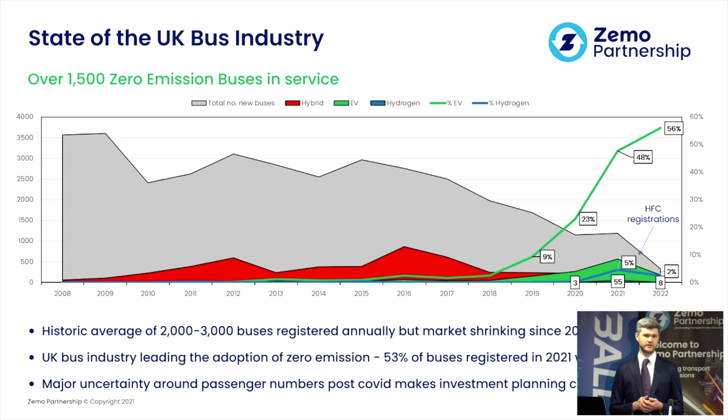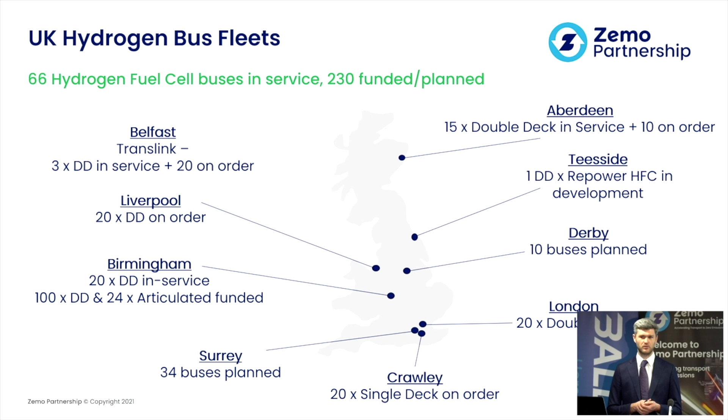In terms of hydrogen bus fleets, we're starting to get a good number of fleets across the UK. We've obviously got those up in Aberdeen, we've got the ones here in London and those in Birmingham, and we've got a good plethora of fleets coming on board. 66 in total are in operation today. We've got another 230 funded or planned. So we will have a decent number in the next few years of hydrogen buses on the road.

There are also major hydrogen infrastructure plans. Obviously, we've had the hydrogen strategy from government, as well as the Scottish Hydrogen Action Plan, both of which are looking to deploy 5 gigawatts of hydrogen production capacity by 2030. So there's a big ramp up in the next few years in terms of hydrogen capacity. Big hubs are going to be Teesside, Humberside, Merseyside, obviously where there's big chemicals plants, and there's already a big push to reduce the carbon intensity there.

And there are also some interesting projects such as the Dolphyn project up in Scotland, where they're deploying electrolyzers on wind turbines to produce hydrogen at sea. So I'm quite interested to see how that goes.

In terms of bus operations, it seems like there is an emerging trend that there's going to be a centralized production of hydrogen, and then that hydrogen is then tankered to the fleet operators wherever they are. So rather than having decentralized small amounts of hydrogen production, it's going to be produced in large amounts and then shipped to where the depots are and the refueling stations are.

Government funding is very much driving the transition towards zero emission. We've got almost 3,000 zero emission buses outside of London which are either in service or have been funded. There is more funding to come next year - there's 205 million that DfT have yet to allocate for England. We've got another almost 60 million in Scotland to come as well for the next 3 years.

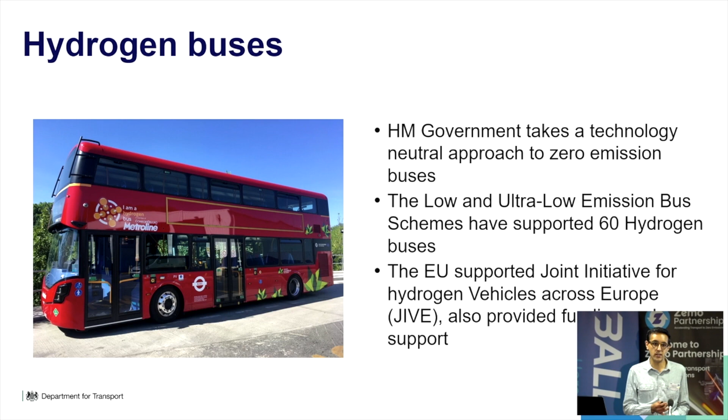I think Dan mentioned the West Midlands hydrogen in his previous talk, and I think it's very exciting because it'll be the largest hydrogen bus fleet in the UK. That was part of an announcement on the 26th of March where we announced almost 1,000 zero-emission buses with nearly £200 million of funding. You can see some more detail on the screen there, but again, that reiterates government's commitment to decarbonising the bus fleet, as we said in the National Bus Strategy and the Transport Decarbonisation Plan.

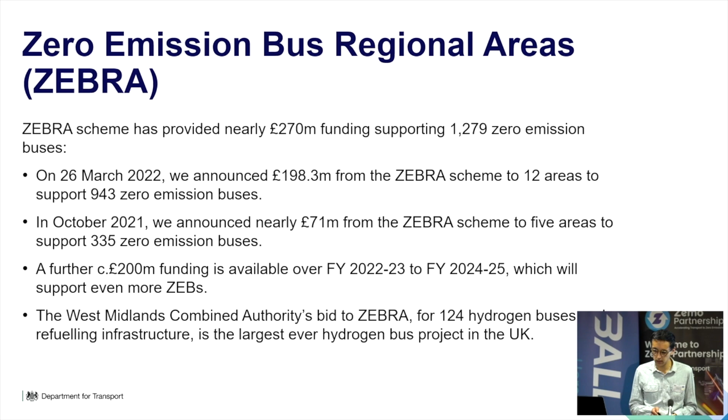Just mentioning another thing that Dan spoke about, which is the BSOG Zero Emission Bus Incentive. As Dan said, this was announced on Friday, the 1st of April. Many of you will be aware that under the old Low Carbon Emission Bus incentive, zero emission buses were only eligible to claim 6p per kilometre under BSOG. Through this, they'll now be able to claim 22p per kilometre.

This is ahead of a broader reform of BSOG, which again we committed to in the National Bus Strategy and which is reaffirmed in the Transport Decarbonisation Plan. A good thing to pull out of the National Bus Strategy is that we call the existing BSOG regime a fossil fuel subsidy. So it gives you a direction of travel in terms of what we want BSOG to achieve going forward - achieving both environmental aims along with increasing patronage and reducing fares. One thing to pull out from this new BSOG announcement is that unlike the LCEB, this will include vehicles which are under 22 passengers/seats, so minibuses which are zero emission will be able to claim the BSOG ZEB incentive.

A bit more on this, specifically on hydrogen. Being pragmatic and recognising the current status of the hydrogen economy, we are not going to be asking, for example through the RTFO, for certification on green or blue or any colour of hydrogen. We're being pragmatic - this is purely for a temporary uplift. The broader reform of BSOG will obviously take a view on the provenance of any hydrogen used, but at the moment we're being pragmatic and allowing any source of hydrogen.

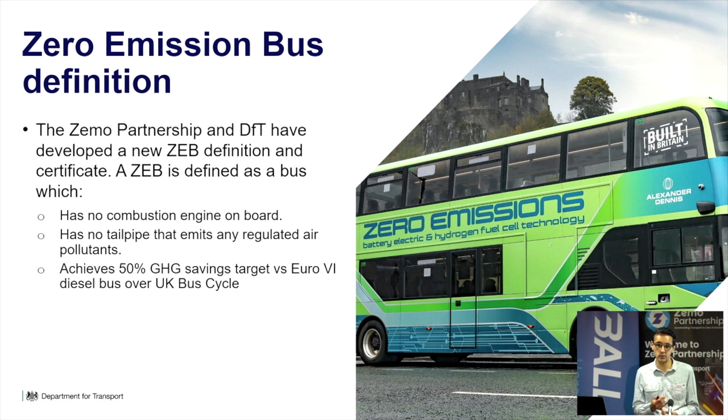Again, Dan mentioned this, but along with Zemo, we've developed a zero-emission bus definition. I'm sure you're all familiar with it. Basically ramping up from ULEB, so instead of 30%, 50%, but the important thing is having no internal combustion engine - so no hydrogen combustion, no diesel heaters - are key things to remember.

Something we're doing with Zemo - this is the Zero Emission Vehicle Repower Accreditation Scheme. As part of that BSOG uplift, we committed that repowered vehicles would be able to access it if they can get a ZEB certificate. The route for them to get a ZEB certificate would be through going through this ZEVRAS scheme. So Zemo are currently convening a working group and looking to put forward proposals, hopefully having something in place in due course.

Just a final update from us. Alongside that funding we announced on the 26th of March, we also announced some policy proposals on ending the sale of new non-zero emission buses. Again, this was something committed to in the National Bus Strategy. We ran a light touch consultation last year, and everyone's input into that helped shape our proposals.

So we're now seeking information on a specific date between 2025 and 2032. A key thing to take away from this is that this would apply to Class 1 and 2, M2 and M3 vehicles, for those of you who like your type approval. We're also taking a question on whether that is an appropriate method to regulate, but it does slot in with the existing car, van and HGV phase-outs. This consultation closes on the 21st of May.

If anyone has any questions about it, I would encourage them to get in contact with the department. There's an inbox, buses@dft.gov.uk, so please just give us an email. We'd be happy to chat through any of the things we've discussed today. But I think that's it from me.

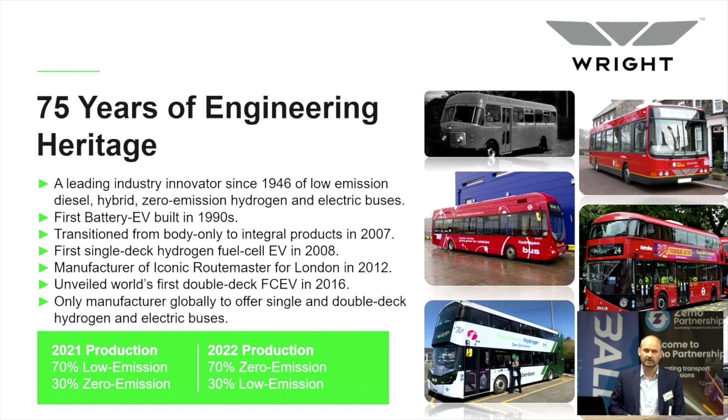An interesting point about production: last year, 2021, we were 70% low emission Euro 6 diesel vehicles. This year, we are 70% zero emission, the majority being EV, although we are pushing as hard as we can to have a mixed fleet across that.

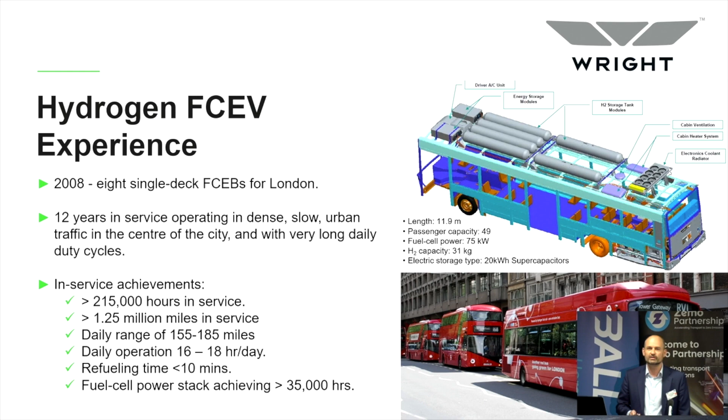Just to touch back on the first hydrogen fuel cell vehicle, 2008, 8 single decks, 12 years of service. I can run through the stats, but at the end of the day they were very successful, which gave us the launch pad to move on to the next product, which becomes the Hydroliner. The figures tie up with yours, Dan, in the sense that this is what will be operating this year for the Wrightbus Hydroliner within the UK.

Just to touch a little bit on the vehicle itself - as a manufacturer I'm always going to throw in another product next to it because we can get away with that with agnostic. But it's very simple in the sense that there are 6 hydrogen tanks at the back of the vehicle, as you'll see here, 27 kilograms of hydrogen at 350 bar, getting a range of circa 280 miles, an 85 kilowatt fuel cell, and the battery system. It's a very simple, straightforward product.

The Electroliner, which is effectively the same vehicle on the other side, has the battery packs in the deck to try and maximise passenger capacity. Currently we're working on 2 battery packs at 340 and 454, giving 150 and 200 miles.

That bus is on demonstration throughout the UK at the moment. We're running telematics on it all the time. What we're very keen for people to do is use it and keep using it so that we can verify the data we have in the field and make sure we're getting the ranges we think we are. At the end of the day, the engineering team are very confident, but it has to be operated in temperature and loading and everything to get the truth of the matter, and we will publish those stats.

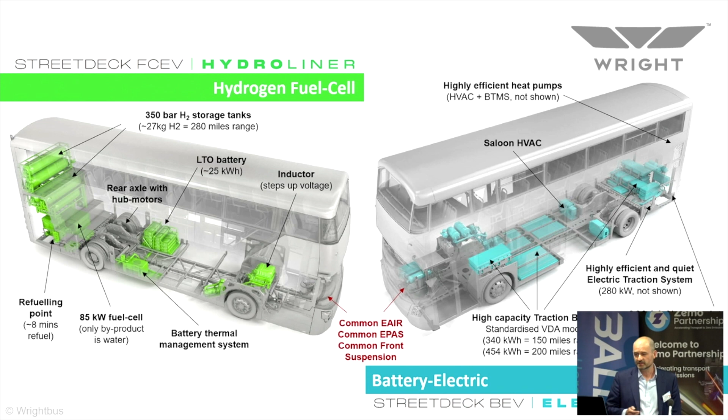There's a commonality of systems across the buses. These are buses that are built to be electric buses and hydrogen buses - it's not a diesel bus that's been altered, and that's very important as we progress into the next set of products, which will again be available this year. Our single deck hydrogen and electric buses effectively have highly efficient and quiet electric traction systems, with commonality of parts between the 280 kilowatt motor, the inverter, and the voice system in both buses.

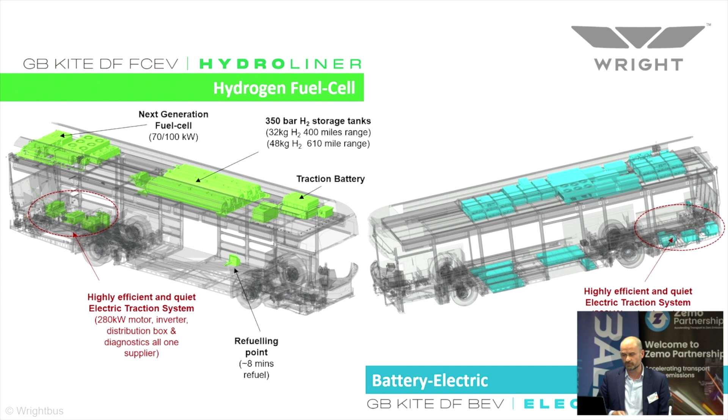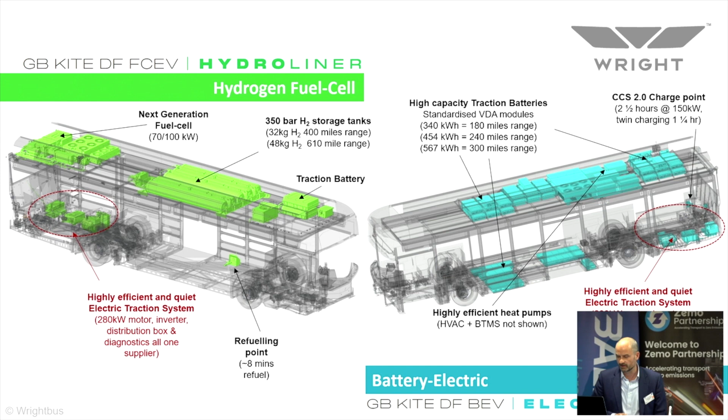The next gen fuel cell on the hydrogen bus is 70 and 100 kilowatt, and then you get to the different sets of tanks on the roof, 32 kilograms at 400 miles and 48 kg at 610 miles. That product will be operating towards the end of this year. Then there are 3 sets of options on battery packs on the single deck buses, getting from 180 to 300 miles.

So the simple fact is that was the interesting aspect, how Wrightbus had managed to get an 18-ton bus moving, and what the future holds for hydrogen.

When you've got high daily hours of operation and a high energy demand, then you've got a question as to where hydrogen sits within the EV side. We are very much of the opinion that when it comes to heavy capital equipment, where it's an onerous route and you have limited charging, hydrogen very much is the answer. If you're doing refrigerated seafood delivery from Aberdeen to London for the restaurants in the morning, you can't be stopping and charging every two hours. It doesn't work. So we have to find a way with fuel cell technology.

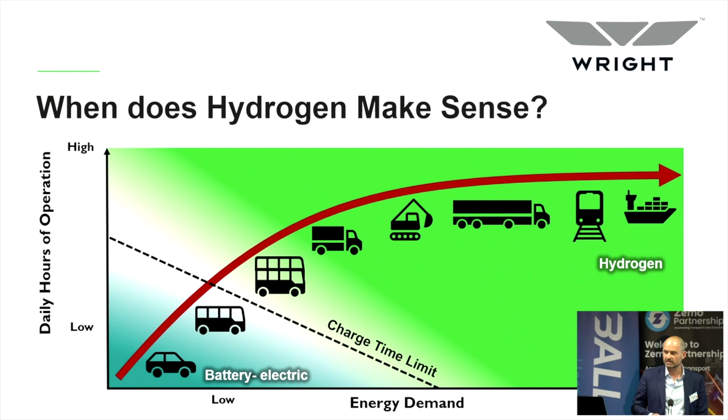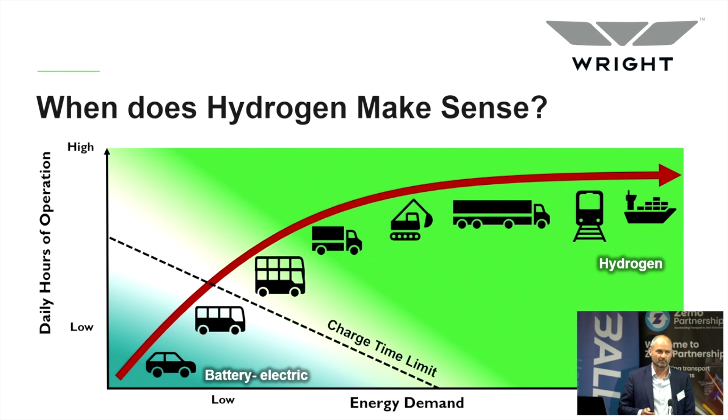There was a mention of hydrogen combustion engines, which is also what other people are looking at. The one issue with hydrogen combustion, as the DFT have rightly said, is that it does emit. You're still getting a NOx off-take from that. So you've got rid of the particulate matter, but it's not a zero emission product. Very simple fact, and we are very agnostic as a manufacturer in the sense of the product that we put out there. The most important thing is that people look at what's available and analyse the information. Everybody knows their routes, they understand their passenger loading, and the product in essence will work itself out.

Battery electric vehicles are more efficient and less energy demanding, but they're limited in range. Fuel cell vehicles are not as efficient, but they have far better range. And that can only improve.

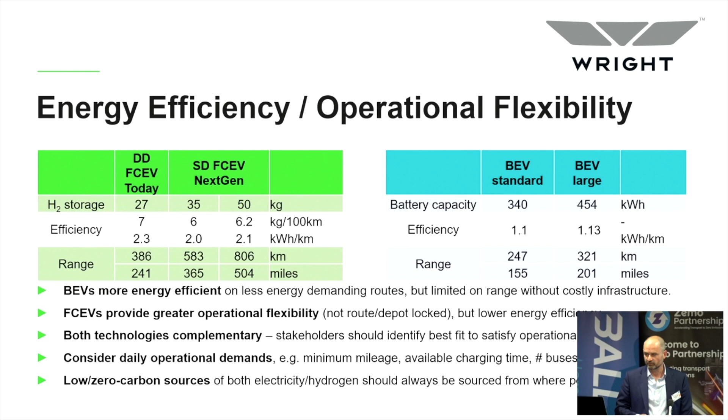What we do as a business - we have a great history with Queen's University in Belfast. We run a diagnostic tool, a route planning tool that has been built up over 25 years. It's completely linear, there is no input from the manufacturer. It looks at the bus, the routes, the loading, the topography. You can change the temperature, you can change the amount of people in it. You can run it across whatever routes you have, and effectively it will tell you what the end technology is - whether that be diesel, hydrogen, EV, a 3-string EV mobile, or a 4-string. It allows you to look at the routes within your area and decide what the best technology is, without thinking well, the battery man's telling me this or the hydrogen man's telling me that. It should be a simple decision based on the output that is required and the route itself.

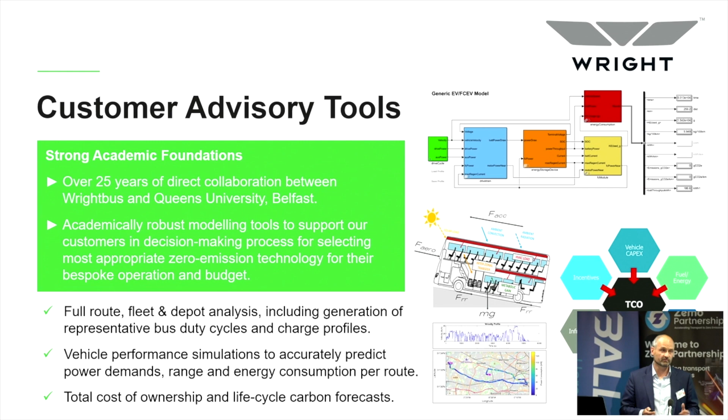I was at COP this year for two weeks, and I got more questions about safety than anything else on the bus, because people who are not in the industry just open the back, see hydrogen tanks, and instantly think of danger. But there are very simple key safety measures, and hopefully when we go out today, Ian will touch on it. These buses are incredibly safe, and it's a very simple way to move them into a depot if you understand what you're doing.

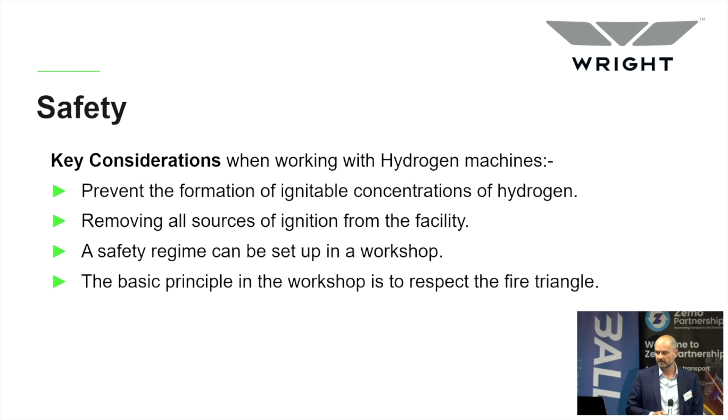So in summary, more than anything else, there is a step change in fuel cells. They're becoming more efficient, the cost of tanks is coming down, as are the drive lines. As has just been commented on, the scaling up production of H2 is happening across the country. The fuel cells are becoming more efficient. We as a business are getting better, having now come through 2, 3, 4, 5 years of this, at getting efficiency out of the fuel cell and getting the bus to do what it's meant to do, as well as getting use of the heat generated to run the bus.

Hydrogen is definitely in the bus market. We can see fuel cell buses operating, and they're operating very well. So we're now getting to the point of what's coming next. And we as a business, as I said, are completely agnostic in the sense of what products we do - it should be the route that dictates what the product is. But given what's happening in the world at the moment, certainly our energy security is very important, and hydrogen is very much a part of that. These buses are operating today. If you require any further information, we will be here for the day, and more than happy to talk about it, and looking forward to the visit with Ian today. Thank you very much.

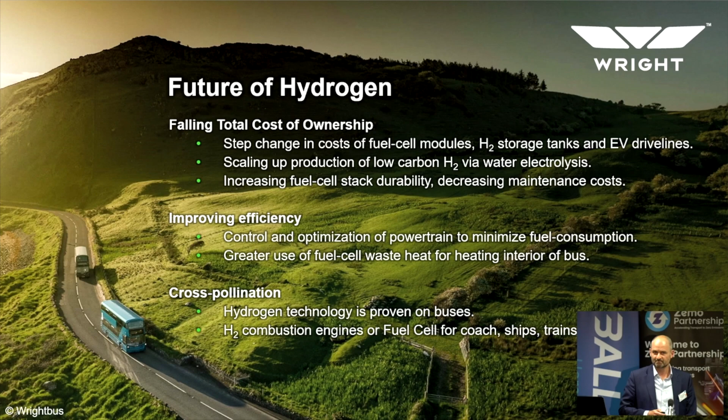Right side. Right side there. Right side. Okay.

Good morning, everyone. I'm Ben Worth, Managing Director of Fuse Finance Limited. Thanks for that, Tom. Fuse is a lease and asset management company.

We're part of Jo Bamford's group of businesses, which includes Wrightbus, who Tom spoke about previously, and Ryze Hydrogen. We're privately owned by Jo.

We're a zero emission specific asset finance and asset management business, and given the complexity of the different stakeholders required for decarbonisation, we've formulated an SPV funding model which accommodates all the different stakeholders required to achieve zero emissions. This enables us to meet with operators and provide a level of service where we look at depot upgrades, the charging and fueling requirements, the buses themselves, be that battery electric or hydrogen, and additionally look at R&M packages or parts assurance agreements as well.

So Fuse really is to sit there and try and make what is quite a complicated process as simple as possible for the end user, the operator. And Tom's already alluded to the TCO model that we've developed.

Quite simply, we sit there with the operator and, using the route planning system, identify the optimum vehicle for the required services. That enables us to identify the infrastructure requirements, be it hydrogen again or battery electric charging facilities. That gives us the fuel and power indicative costs and also the maintenance costs. And we then can sit with you, the operator, and give you a detailed TCO calculation.

Again, I can't reiterate that a fuel cell bus is an electric bus, and I quite like this slide because it kind of shows the difference on where we are. So with a battery electric bus, we've got potentially low initial infrastructure costs. There can be issues getting enough power into the depot - I can see Ian's grinning, so I'm not sure. We've got low maintenance costs, and we've got high powertrain efficiency you often hear about. But we often have a bit of a range issue.

So with both vehicles, a fuel cell and a battery electric, we've got zero emissions, we've got good efficiency, we've got an electric drive, and we've got low noise. But with a fuel cell vehicle, the infrastructure costs reduce as we scale up proportionately. We've got a fast fueling time, and that's incredibly important for a bus operation. We don't have any reduction of passenger capacity. We've got a longer range, so a fuel cell vehicle can be a direct replacement for a diesel vehicle, so it can be a drop-in replacement. And not so much in the UK, but elsewhere, there's more tolerance for extreme weather conditions.

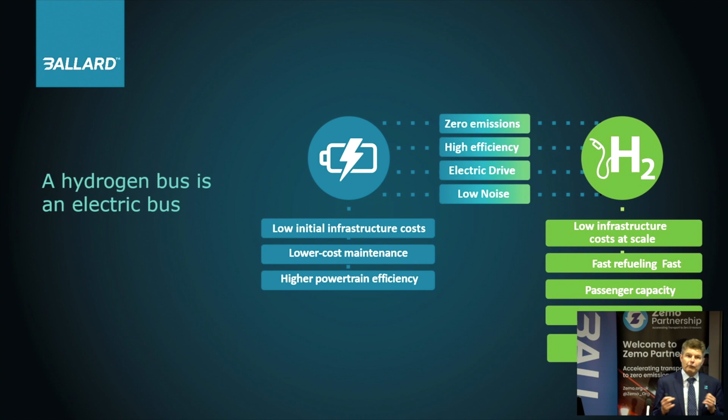So for some of you, I'm sorry if you already know this, but I just thought I'd run into what is a fuel cell, because the word is bandied around a lot.

A fuel cell, very simply: you've got hydrogen stored in your tanks, and we need oxygen that's in the air. In the fuel cell, we've got the proton exchange membrane. You've got the oxygen on one side and the hydrogen coming in; it takes the proton from the hydrogen and lets that through, but not the electron. So we use that electron to power the bus, because it wants to rejoin its proton, in simple terms, and then joins with the oxygen atom, so we get water, H2O.

So our only emission is pure water. In theory, the process is quite simple, and what you see there is one fuel cell. What we actually have in the bus is lots of those put together, what we call a fuel cell stack, to get the power that we need.

Then we take that fuel cell stack and put it into what we call a module. The module has all the balance of plant to get the hydrogen going into the stack at the right rate, the oxygen or air going through the stack at the right rate, coolant in there, and other things to get all that going.

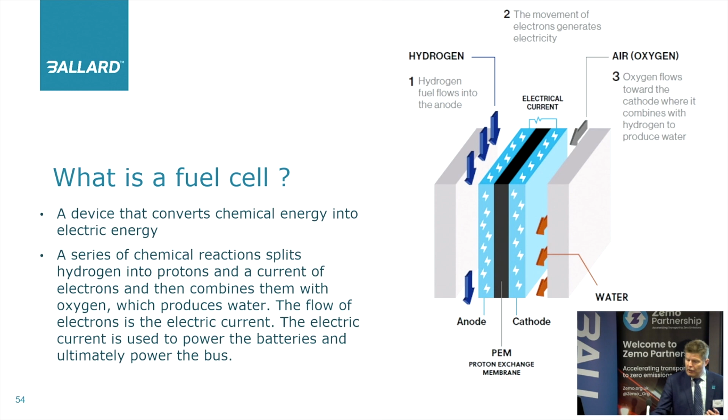So what you end up with is a fuel cell module, and this is our FCmove platform, just an example of what it looks like - fairly literally a black box. This is our 100 kilowatt version, where we've got a rooftop version, which is the long flat one, and now we're developing an engine bay version. So that is basically what a fuel cell is.

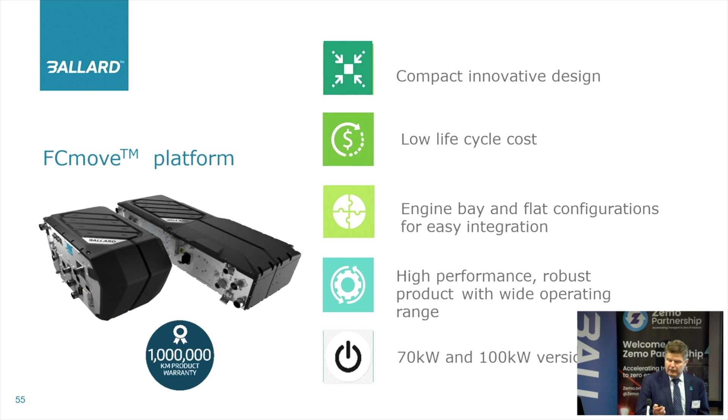It's quite simple to explain on paper, but all we're doing is producing electricity to run an electric bus. And I think that's a good way to think about it.

So the advantages, as I've already touched on, are maintaining speed and being able to use demanding routes - we're not so worried about topography and speeds. The range is good, so we've got flexibility. In a bus environment where you've got a whole depot full of buses, one of the issues with battery electric buses is you might be route-bound for one particular type of bus, whereas with a fuel cell bus you could have the flexibility, like you do with a diesel bus, to put them on different routes.

Hydrogen has a high energy density, but also, very importantly, we've got quick fueling - we can fuel in a matter of minutes as opposed to a battery electric bus, which can take a number of hours. The beauty of this from an operational point of view is that we can keep the same operational procedure and process as we do with a diesel bus. So the bus goes out all day, comes back, fueled, washed, parked, ready to go out again the next day.

I've always said, especially when I was operating the buses, a bus's job is to move people from A to B - that's what we're trying to do. We don't really care too much about what the driveline is, because if you're waiting at a bus stop, you want your bus to come along. You don't really care - certainly in London, people don't care what comes along, they're going to get on the next bus. So really, the more boring you can make the bus, and it just does the job - that's actually the more successful you are. And the fact you're doing it zero emissions is great.

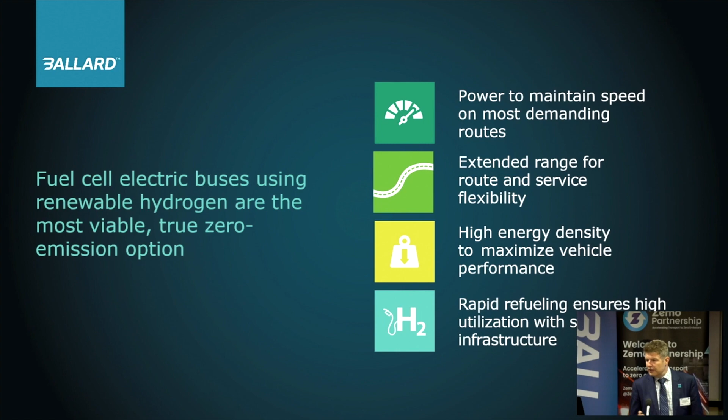So just a little word on pricing and where we've come from. This graph shows some of the projects that's happened around Europe. The buses that Tom showed in the picture, the single deck, were brought in as part of the CHIC project - a European funded project from the Fuel Cell and Hydrogen Joint Undertaking. London ran 8 of those buses.

And then as projects have come on, with High V.LO-City, HyTransit, the cost of the bus has come down. London was also involved in the 3Emotion project, where 2 extra buses were brought in, so the fleet went from 8 to 10 buses that ran. And then we've moved on now to the Jive project, which is what we're involved with in London.

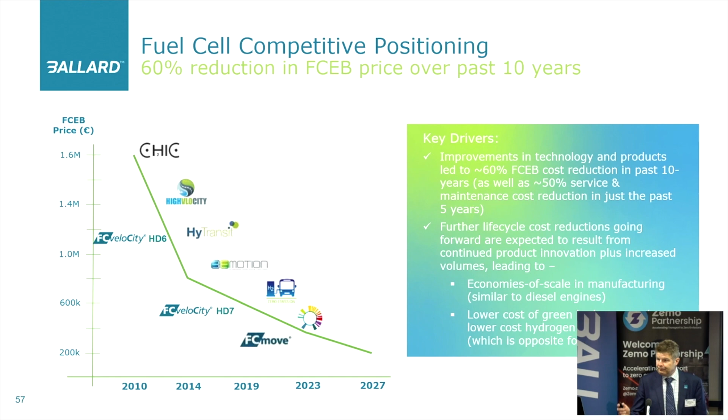The price is continuing to fall, so the further we go on, the cheaper the buses will get, and along with that, as Ben said, with the TCO, etc. So just to finish up, I've got a couple of extra points.

You'll see that Ballard's tagline now is "Here for Life," and we're very much about that. We've got an after sales service when working with an OEM such as Wrightbus. We have application support that we can help with. We now have the BMS offering where we can do further work with the integration of the buses. We know that it's very important on running buses that you cover the whole life of the bus. That's important, and that's what we strive to do. We have 2 technicians based in the UK for servicing buses, and as fleets grow, I'm sure that will grow too.

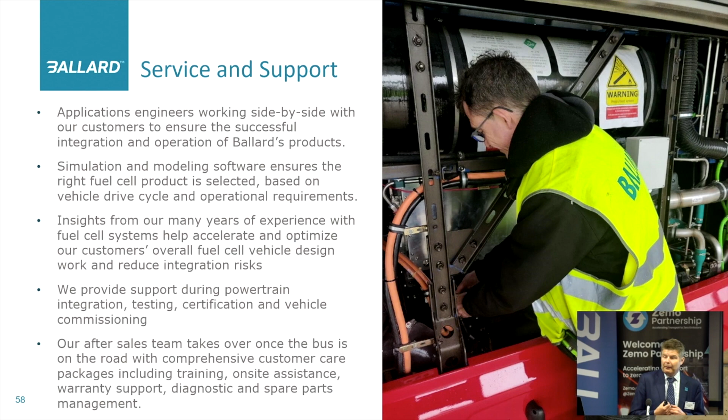Ballard are committed to being carbon neutral by 2030. But what's important to note is that the fuel cell can be refurbished when it gets to the end of its life. We can refurbish, we can recycle most of the platinum that's in there, we can reuse our plates, rebuild the stack, so you've got a sustainable product that you can continue on with. That's a very important factor, and I think sustainability is going to become a bigger issue moving forward.

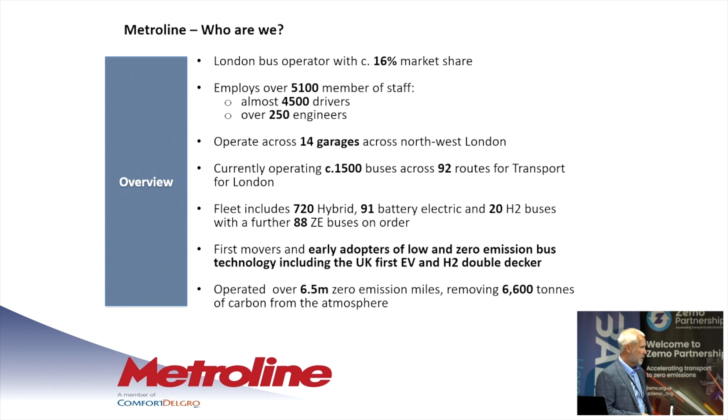6.5 million zero emission miles in the last 3.5 years. So probably...

2018, Martin? 2018, 2019 - in 2019, we're in discussions with TfL about becoming the preferred operator for operating 30 hydrogen buses, which subsequently was reduced down to 20 because of funding issues.

And within that, there was a decision to be made on what type of hydrogen we were going to use, where the hydrogen was going to come from. From that, we decided not to produce hydrogen on site, as they do in Aberdeen - we've been up to Aberdeen and looked at the operation up there. We decided that we were going to tanker the hydrogen in, because there was a redundant wind farm in Kent, which Ryze were going to take on, and they were going to produce hydrogen from there. Then it would be tankered into us at Perivale down the road, which you'll see later on.

Even though we're not using the power station, the hydrogen production plant using wind power, the station is still set up as it would have been for that. So as that comes online, the tankers will be replaced by tankers bringing in hydrogen from the wind farm.

In terms of the site, when you get down there, this is where the practicalities of transport don't tie up with the expectations of salespersons and developers who think everyone's got a square or oblong garage where everything fits perfectly. This is a prime example. When you get to this site, it's shaped like a wedge of cake - really big at the front, and it just gets smaller and smaller going down to the bottom.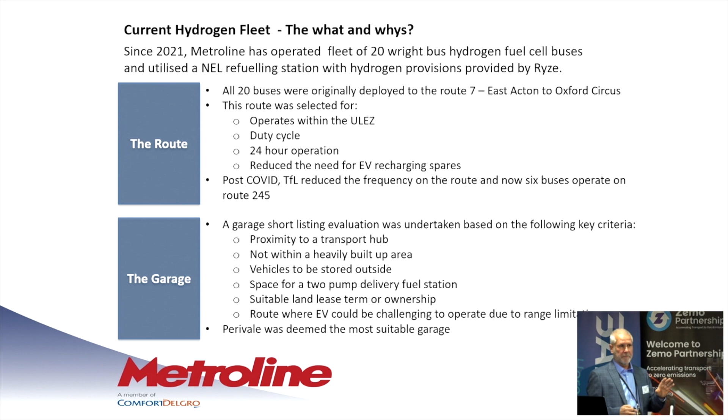So the reason Perivale was chosen was Route 7, the primary route. It runs from Perivale into the centre of London, through Holland Park, through Marble Arch - very high profile areas, very high pollution levels as well. It's a high priority route, a 24-hour route, and an intense route. So it gave TfL a bigger bang for their buck in terms of everybody seeing it - it's in those very visible areas. And for us, it has an instant impact on the pollution in the area that route runs through.

Our specification for the site was we didn't want it in a big housing estate because that would have caused more problems with the planning for Ealing. So the Perivale site sits on the edge of the A40, a fairly industrialised area, and the nearest housing is 200 or 300 yards away. So it's kind of ideal - an open air depot, none of the vehicles are parked underneath, so it reduces the risk for our insurers.

And then we created space for a 2 delivery fuel pump station. Two delivery fuel pump stations for 2 reasons: one is there's a certain amount of redundancy built in, so if one packs up, the other can be utilised. Secondly, it allows us to fill 2 vehicles at the same time, which means the run-in is faster, and it stops any tailbacks and transport issues with the council because the vehicle's not going back out on the road. So it's very similar to the diesel cycle.

And for the other thing, which is really important for EV and hydrogen, if you don't own the land, the cost of bringing electricity in for EV or hydrogen, the siting of the substation, the fact the grid operator wants a 99-year lease and you've got a 5-year lease on the land, doesn't make for easy contracting with anyone. So we chose Perivale because I'd recently renewed the lease for 20 years, which made it easier to get the landlord to agree to us siting the substation there, which now we're going to go back to because we need to increase it for the next tenders coming through.

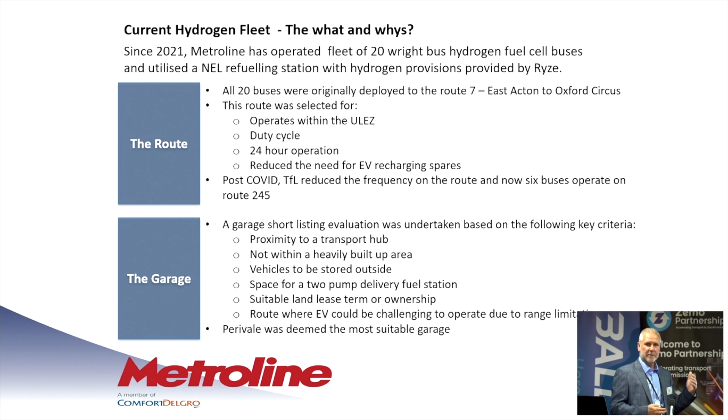Current performance - I'm not going to lie to you, there was a lot of teething problems with the vehicles when they first arrived, mainly sensors and switches. In terms of the fast fill, this is a refrigerated hydrogen fueling station. A normal hydrogen station takes 15 to 20 minutes to fuel; the target of this station is 5, and we're currently operating about 9. The hydrogen is refrigerated at the point of delivery because as it passes through the nozzle into the vehicle there's a temperature rise and you have that safety issue of possible ignition, so it's super cooled.

The first real issue we had in terms of fueling speed was that the valves on the tanks were not opening fully, causing an increase in temperature, which the safety system was then shutting the fueling down - there's an infrared communication between the vehicle and the fueling station. That was rectified, took a couple of attempts. Sometimes some of the valves were leaking when they were changed, but Wright's got there in the end.

The biggest issue we've had, and those in the business with us will already know what that is, is that the subframe assemblies holding the hydrogen tanks started to crack and come adrift due to the resonance from the driveline. That's been rectified, and the vehicles are now back on the road. So from my team's perspective, it's now a reliable vehicle, out doing the mileage with minimal interaction with Wright's and our engineering team - it's actually doing what it says on the box now.

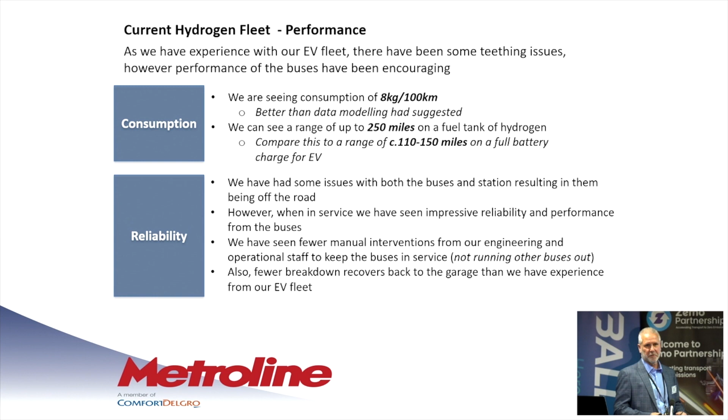So we've kind of touched on those issues. Electric vehicles, we're constantly changing them on the road for a variety of reasons, but mainly because we can't charge them quick enough to cover the mileage, or they don't cover the mileage. The hydrogen buses, first 2 months, we had several vehicles towed in for teething faults and whatever, but since we've gone through those, it's dropped off to nothing. I'm probably recovering 4 EVs a day at the other garages because there's just not enough charge room to complete the route, and there's nowhere for us to put a top-up charge. So again, shorter routes under 100 miles, EVs are perfect if you can charge quick enough.